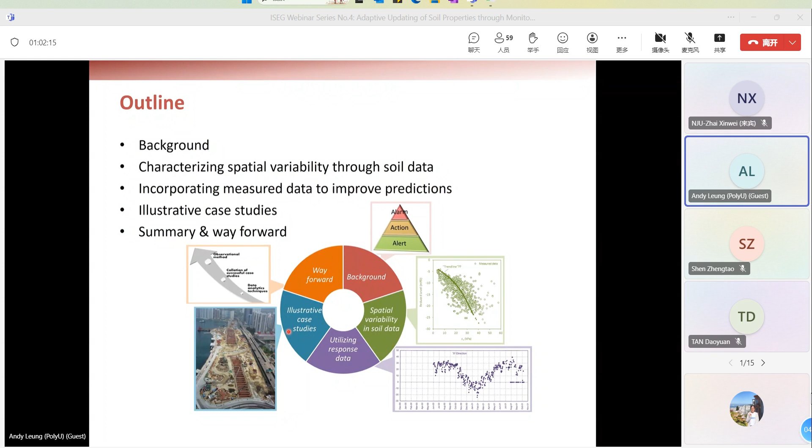So let's get started with the background. I always like to start my presentation with this little diagram. This actually came from a survey in the UK which was conducted to ask 28 construction managers about their projects. Basically the question was about what usually causes trouble when...

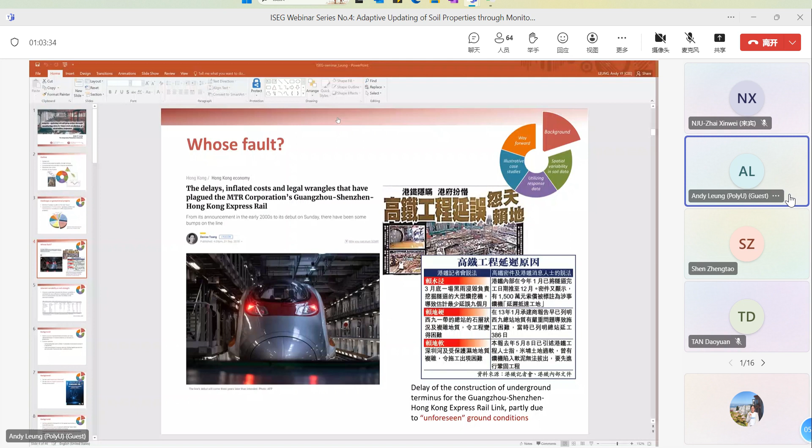Sorry Andy, we lost your voice. Oh sorry, I probably pressed the wrong button. No, it's okay.

So let's go back to this pie chart. Basically what happened was that for those 28 construction projects, the respondents were saying that 22% of them said they had a problem with their project because they were not sure about the soil boundaries. And then some 20% said they had a problem because they did not know exactly what the soil properties were. This is quite interesting but perhaps not really surprising, because as geotechnical researchers or practitioners, we know that for geotechnical engineering, most of the time the problem lies in the fact that we don't exactly know the material or the properties we are dealing with.

So obviously in our profession, we've got lots of nice equations, finite element models, advanced tools, and so on. But if you don't know what parameters to use or what properties we're dealing with, it's very hard to get the right prediction for our design purposes. So that's why I always feel one of the main challenges we want to address is the uncertainty related to the properties or the boundaries of our subsurface domain.

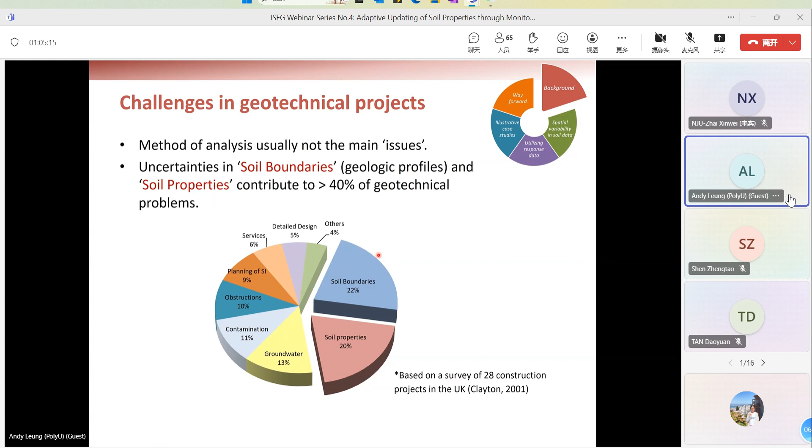So this was about the Hong Kong Shenzhen Guangzhou high-speed rail. Some of you may know the terminus of this high-speed rail is in Hong Kong, the West Kowloon region. This project, this terminus, was actually planned to be completed in 2015, but there was eventually a 3-year delay. It was opened in 2018.

And of course, it was a very long delay, and the public was asking why. The construction companies and the MTR company, who was responsible for this project, listed out several reasons why there was such a big delay. One of the important reasons they cited was that the ground conditions were unforeseen.

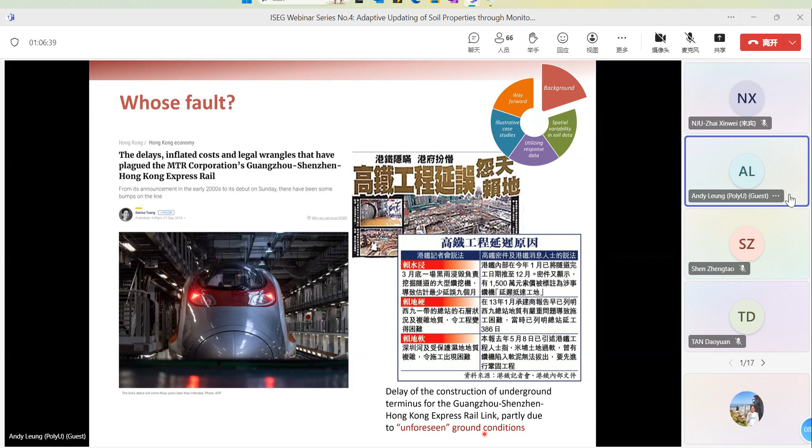But then, I always feel like ground conditions being unforeseen might not really be a new thing in our profession, just like what I suggested in the previous slide. There have been quite a lot of previous studies that talk about the variability of material properties.

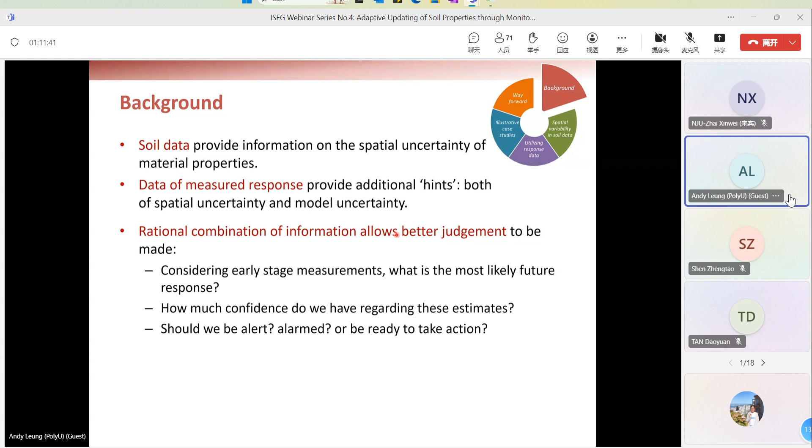After characterizing the spatial variability by theta, we make use of theta to help us generate the so-called random field models. Random field models are basically realizations or models of the subsurface domain, where different colors represent differences in soil properties.

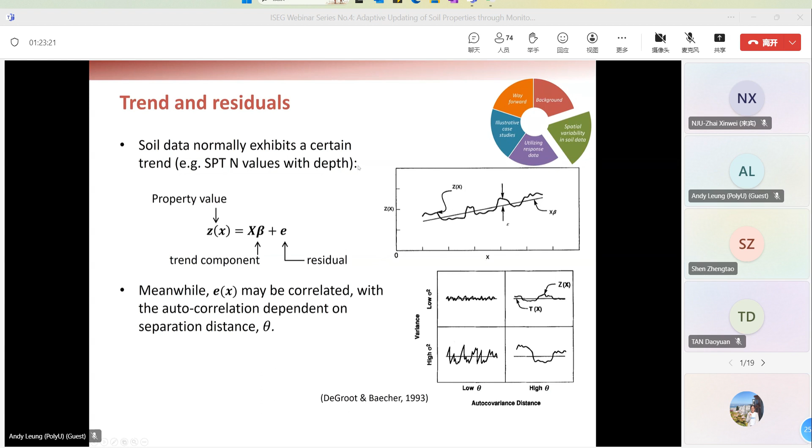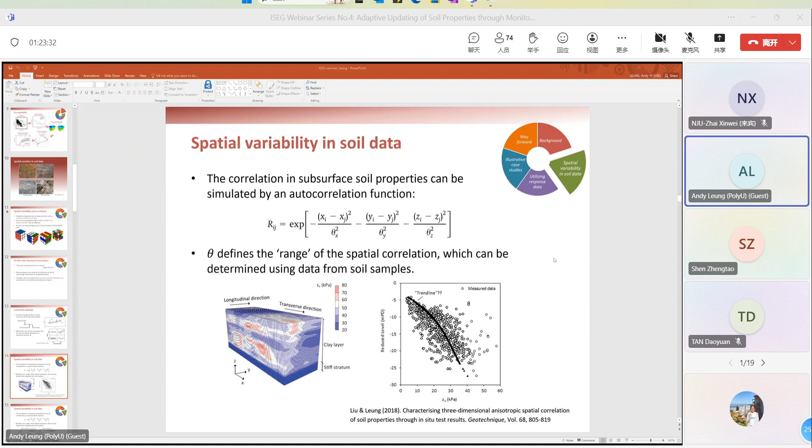Sorry Andy, we lose your voice again. Sorry, it seems like my mic also sometimes doesn't work very well. It's okay, sorry about that.

Right, so we're still on this page. So we also sometimes try to represent or—